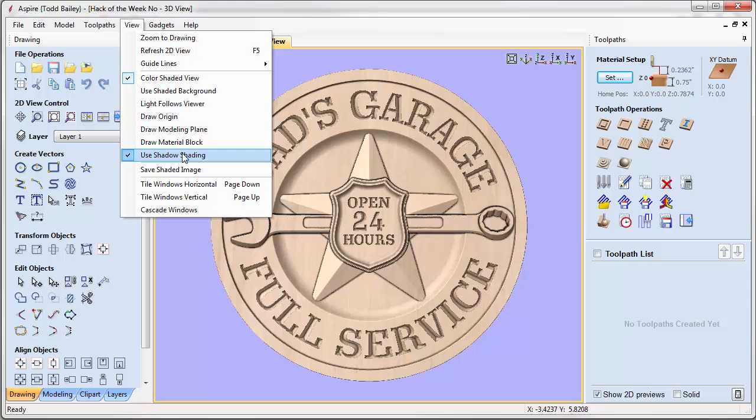So in Aspire and VCarve Pro and VCarve Desktop, you've got a new way to look at your layout, which is the use shadow shading, which we find really good if you plan on sending your image or your layout off to be proofed by a customer or maybe to display on your website. So if you turn it off, you get this. It's a little dull looking, but it still looks pretty good. But as soon as you add in the shadow shading, everything pops right off.

So we're going to do our breakdown leaving the shadow shade on. You can do everything, all the layout, all your modeling with the shadow shade on if you'd like. It's totally up to you. Let's flip over to our modeling tab. So let's turn off all of our components and we're going to start building this up.

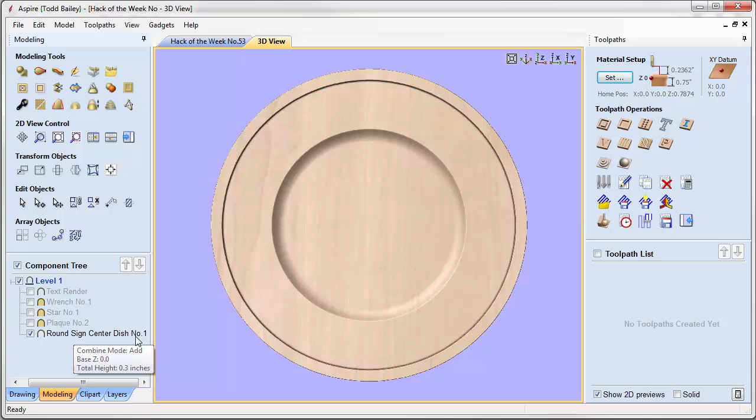So we started out with the round sign center dish #1. That's quite a handle, but anyway, that's from the Mother's Garden #1 project. We're going to merge into that the plaque #2 from the Shipyard #1. We're going to merge into that the star from the Western Saloon #2. We're going to merge into that the wrench, and then we've developed some shapes for our actual VCarve simulation. So that's how we do it.

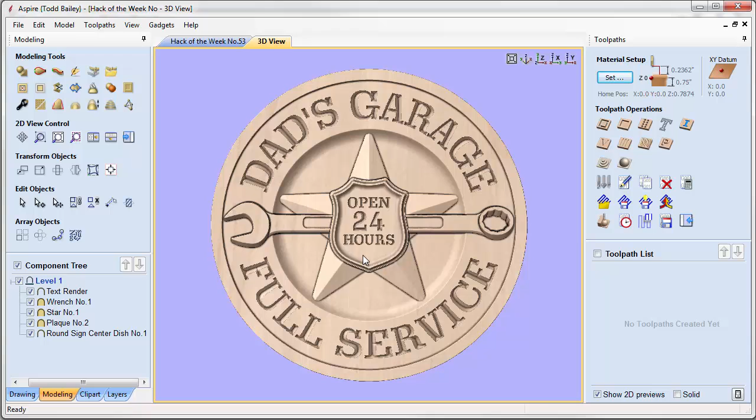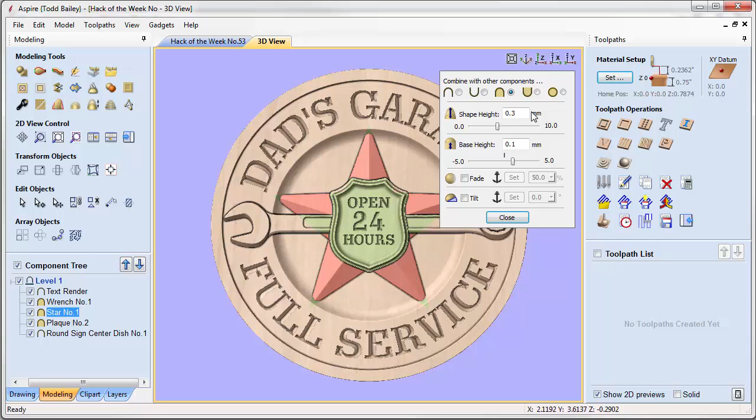Let's just go ahead and bring up our properties for these, and that way if you want to rebuild this on your own you can. You'll see that the plaque shape height is 0.15 and the base height is 0.35. And as long as you leave this up and don't close it, as you click through all of your different components, it will update with you. One thing I did notice is that it still says millimeters there and not inches, but this is in inches.

So we've got a star, and the star is a shape height of 0.3 and a base height of 0.1. We have the round sign. It has a shape height of 0.3. It lays right on the 0 plane, and the wrench is 0.2 and 0.25.

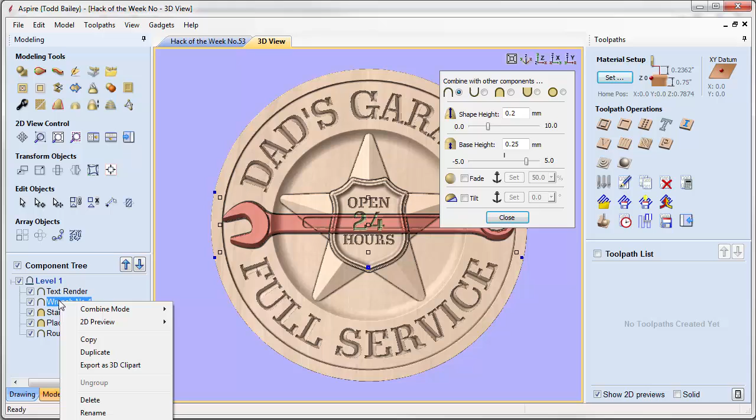If when you're laying this out you find that things start to look a little bit odd, like if this wrench happens to be set to addition, then that's what you're going to get for a look. So you're going to want to right click on your wrench, go to combine mode and go to merge, or you can click right in the 3D view and just make it merged if you'd like, and that looks great.

So let's do up some quick tooling for this. We're going to hide the rendered text, and we're going to go ahead and split the view so we can see both the 2D and the 3D at the same time. Let's start off with setting up our material. It's 3/4 inch thick, of course, and we're going to make sure the datum's in the middle.

Now, where the model or the layout is positioned in the material is important. The actual model, once I had it all scaled up, the layout is a 1/2 inch. So there's an extra 1/4 inch of our material that isn't going to be machined into, and I wanted that to be the backing. Sometimes you may want that to be at the top of your model so that you end up machining through all that and this actually sits on the bottom of your board.

But in most cases, you're probably going to want to have your model at the top and the extra material, the extra 1/4 inch, be actually on the back, so it thickens up your layout and makes it maybe a little bit more robust.

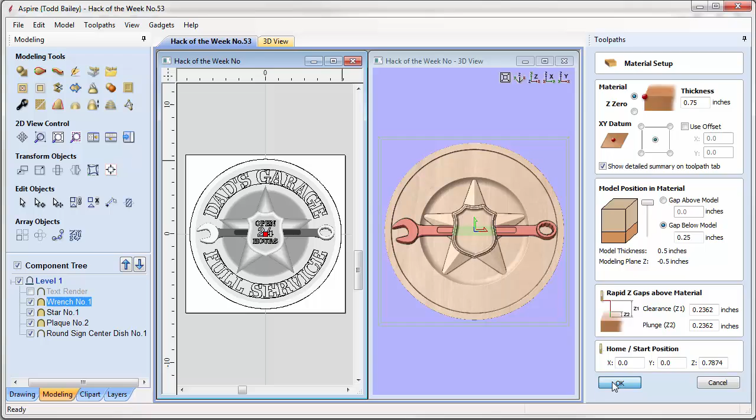I'm going to click OK. Let's go ahead and create some roughing tooling. We're going to select the 1/4 inch end mill. We're going to use the model boundary. We're going to do a boundary offset, which means it's going to rough out a 1/4 inch from the edge of my model, which is great. We're going to leave 0.04 of an inch of material behind. That's the allowance that's going to be left, and we're going to go ahead and calculate that.

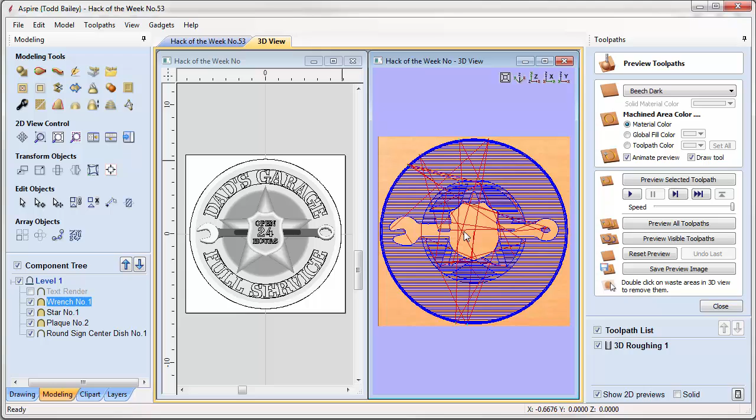Now the way I laid this out, I laid it out so the proud areas of the wrench are actually at the same height as the top of the plaque in the center. So it's really going to make the center of this garage sign really pop. Let's preview that. That looks pretty good. Let's close that down. Let's go ahead and do our finishing pass.

We're going to use the 1/8 inch ball nose end mill. We're going to make sure we have a boundary. We're going to machine the model boundary. We're going to go out a 1/4 inch, and that all looks good. So let's calculate that. Aspire is going to work some magic here at the bottom.

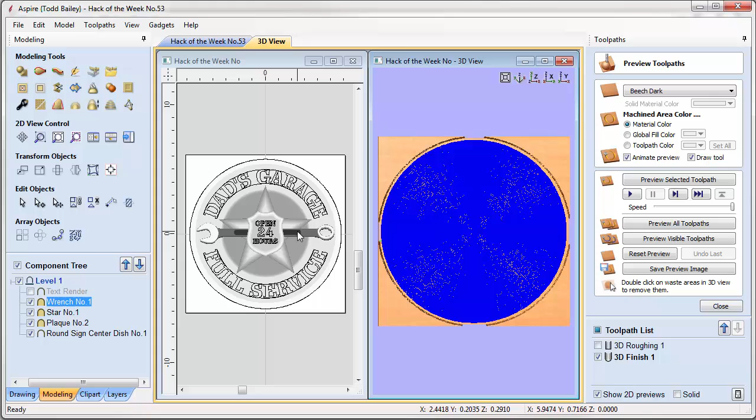And I've already laid out all of my 2D vectors here because, of course, this is Aspire, and I had built that simulated V-carving. But if you're in VCarve Pro, this is when you're going to want to make sure that you have all these laid out already so that you can actually do your V-carving in a second. Let's preview that. That looks pretty good. And we're going to close that. Let's go ahead and do our V-carving.

So we're going to select all of the stuff we'd like to have V-carved, all the vectors. Do our V-carving. We're going to just use all the defaults. We're going to use the V-bit tool of 90 degrees. And we need to make sure that we project that onto our model. If we don't do this, then what's going to happen? In some places, it may just barely show up. In other cases, it's going to end up just machining in the air above your part.

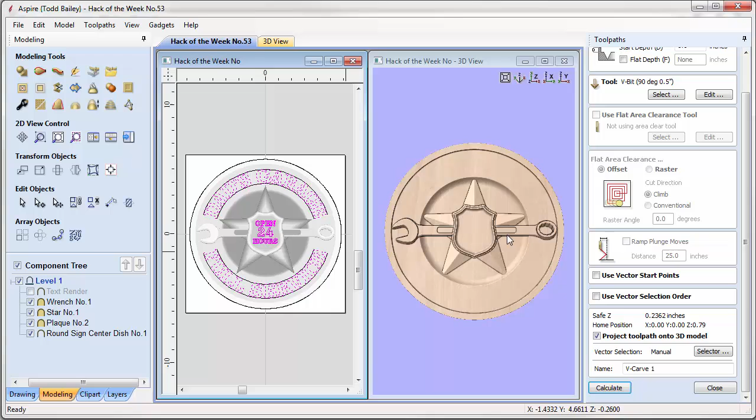When you project it onto your model, it'll actually follow the contours, the shapes, the recesses, and the raised areas, and V-carve right into that. So let's just go ahead and calculate that. Let's preview that. Looks perfect. Now we're going to do a cutout pass. So we're going to use a profile cut.

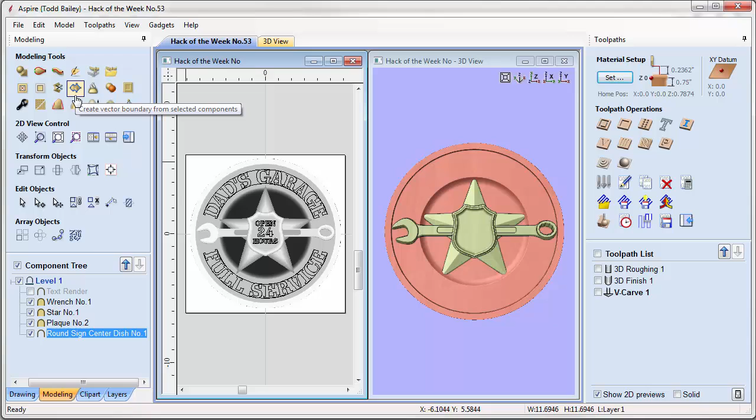And what you're going to need to do is have an outline. So I'm going to go ahead and delete the outline that I have here just to show you how I created it. So I select all of the components that create the boundary of my part. So if I had the wrench happen to stick out a bit, I'd also select it. But in this case, we're just going to cut around the boundary of this circle. There's a create vector boundary from selected components. This is also in VCarve Pro and VCarve Desktop. And Aspire in this case will actually create a vector. We're going to go ahead and profile cut that.

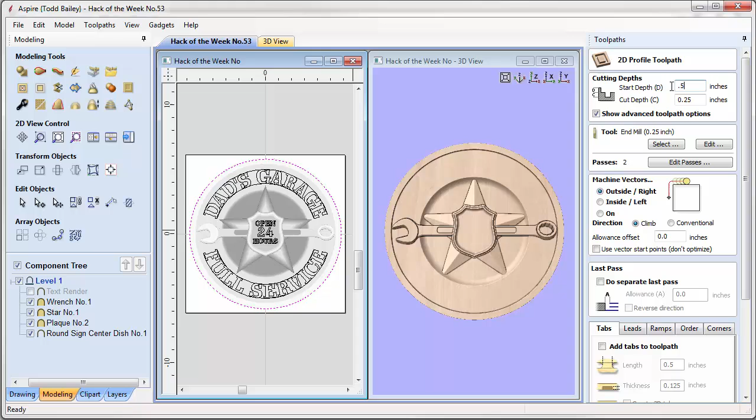Now, this is kind of an interesting part of your tooling. What you're going to want to do is remember how far you've already machined down. So we've already machined down a 1/2 inch because we've done our finishing pass of our layout. So we're just at the surface of that 1/4 inch that we want to keep for our backing. And then we want to do our profile cut down a 1/4 inch from there. So when you add up these two numbers, they should equal the thickness of your material.

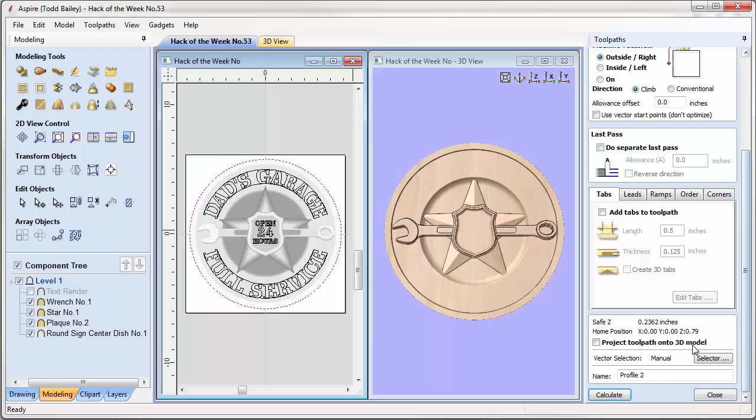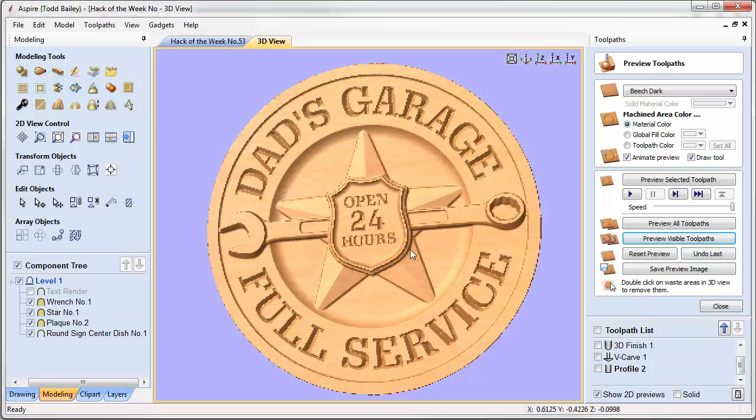It's important. We're going to use an end mill, a 1/4 inch end mill. And in most cases, you're going to want to add in some tabs. But in my case, I want to be able to double click on the extra material and actually get rid of it. So we're going to calculate that. We're going to preview that. And then we can double click on this extra material. And there we have the actual previewed tooling for this new garage sign. And I would say it looks pretty close to what we were hoping to have from our actual layout.